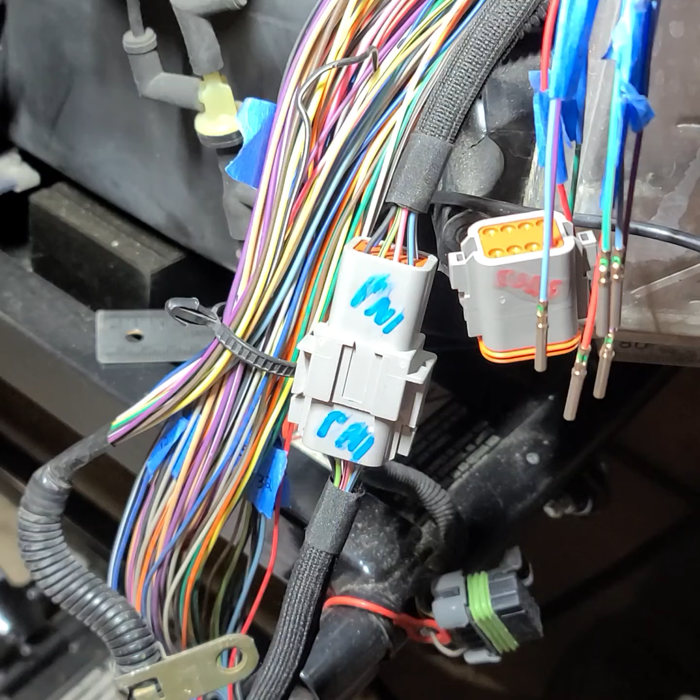Here's something a bit different. Just taking a break out here, it's like 1:30 in the morning. The wife goes to sleep, so I come out here to do all the fun things on the car, like wiring, because it's January 30th, so it's freezing out here with the propane tank taking my oxygen. So why don't I talk more, right?

Something different - this is a Haltech install I'm working on for my 2003 Corvette. Everybody in the world is a Holley user, and I understand the benefit of having friends and local tuners who understand how to tune it - if you have a problem, you have support. That's really helpful, especially if you're not sure what you're doing and don't have much experience, which we all cut our teeth on at some point.

You just got to jump in. But a lot of reading and a lot of talking to people who actually use their cars more than I have. So I'm stepping up to a higher horsepower.

This is a 402 LS2 with, it's going to have a V3 Si. Pretty good sized cam and heads right now - just a jam cam, kind of old school for 2023, but soft on the valve train for medium RPM. I can push it with my valve train, I can go to like 7 if I want to, as long as it still makes power.

I've got the Innovators West damper, so it's going to have 10% overdrive, so my pulley is going to be the same as if you ran like a 3.27. I'll be maxing out that head unit RPM pretty quick, easily by around 6,000 to 6,500.

But the topic here is wiring in the Haltech. So just something different - the Haltech offered, the more I read about it, much more expansion and a lot more opportunity for programming with your car. This is also the 2500T in the Elite series.

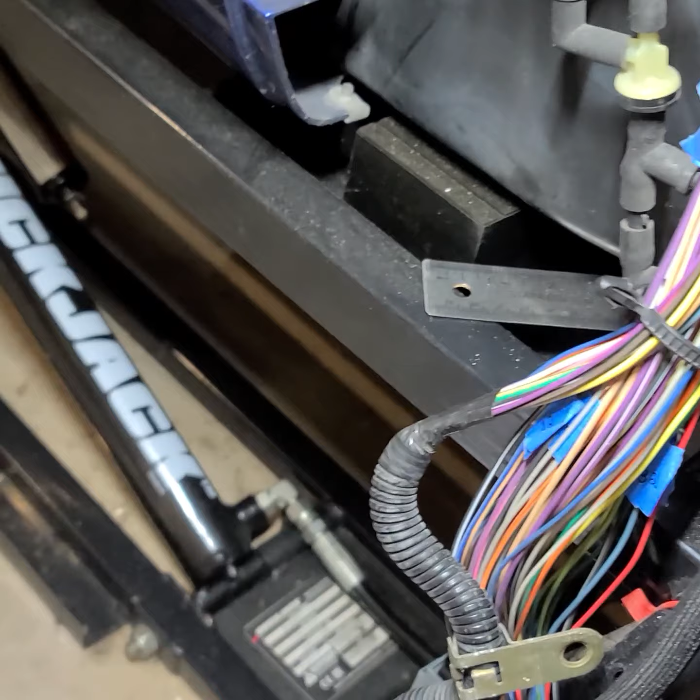Now since I bought it, the Nexus has come out. I don't have much need for the Nexus - this is a modern car, I don't need a lot of power drivers off the ECU. Not a bad thing, but as it turns out, this is also still beneficial for me because the software that comes with the Nexus can now be retrofitted to the Elite Series head units.

So I don't know anything about the software. I've used EFI Live for years, and I'm a hobbyist at that, so I'm not some crack tuner, but I can go in there and get done what I need to get done.

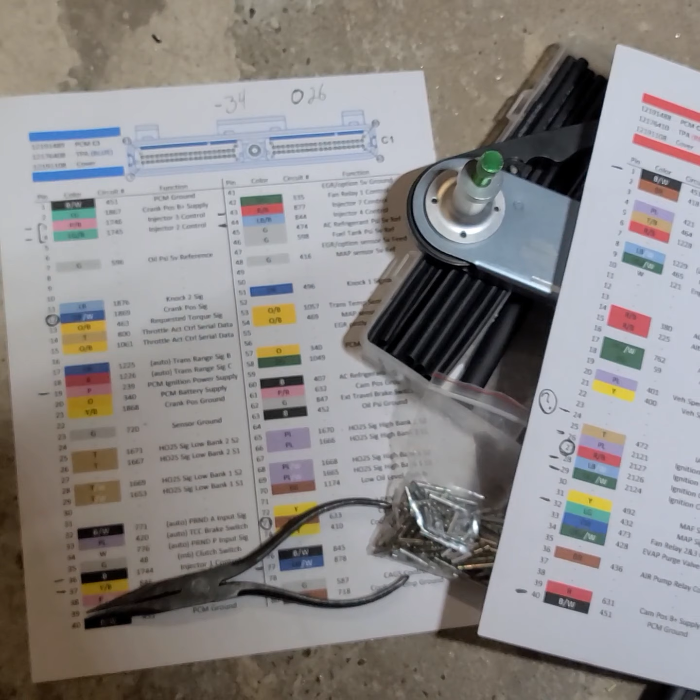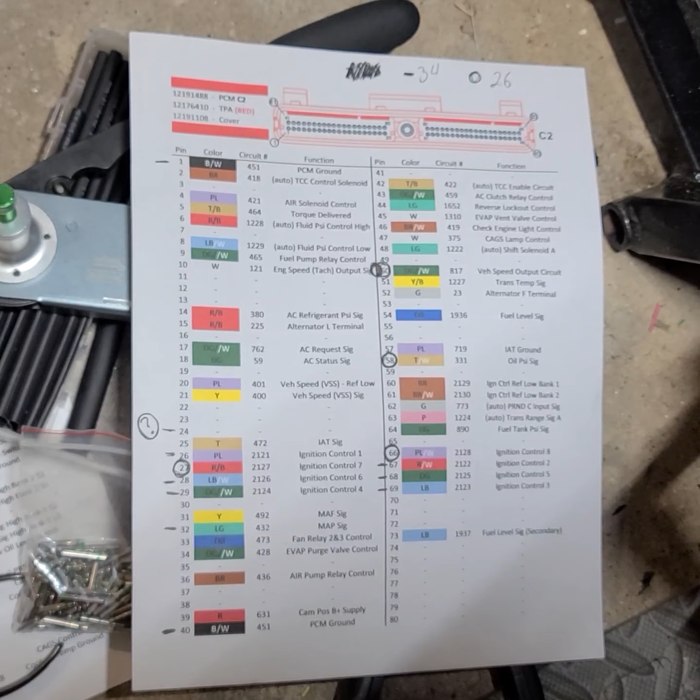And these are just some wire diagrams for the caps. If you're looking for these pinouts, you can get these as well as the TAC pinouts, as well as the Haltech conversion - like my own double-check version of that - right on the Corvette forum. If you look it up, I don't know what the heck I titled it.

My username there is Tusc, T-U-S-C. I have heritage which is Tuscarora Indian, so I don't know, I've stuck with that for years, but...

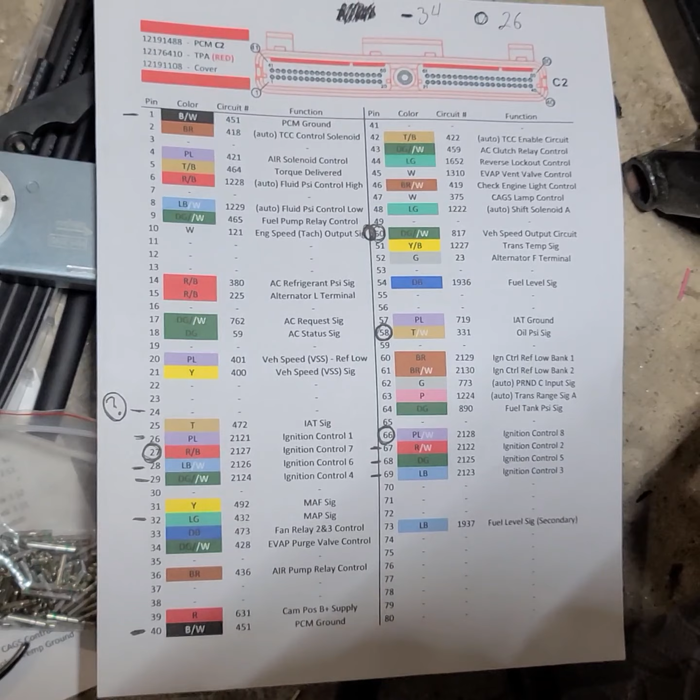If you look up that username and the term pinout and PCM or TAC module, it'll come up. It's an Excel file, and you can just easily print it out - color-coded wires, handy. There's a lot of stuff that I found which was good. It was older, but this is handy - one page each, there's no chasing information. Really easy. And this is daunting to me because there's so many wires, and I already caught myself making one mistake before I finalized a wire, so you really have to double and triple check.

So it'll take a lot of abuse as long as I shift it right. And again, the power, I don't know where it's going to land - probably north of 700, give or take. And this is rigged to run ethanol, so I'm sure once we get everything shaken down and running, we can start climbing to the moon.

But in a modern world where everybody out there has these 8 and 10 speed automatics, and they just make every darn car always in their power band, nobody has to think to drive and go fast. There's no driving, or at least not as much out there. So this is a bit of a cheat.

So the Elite gives you one benefit: you can do no-lift shifting. So just keep your foot on the pedal, keep cranking, and as soon as the engine detects that the clutch pedal starts to move, it knows what's happening and it just changes the tune table a bit. The engine adjusts - it's not screaming off the rev limiter.

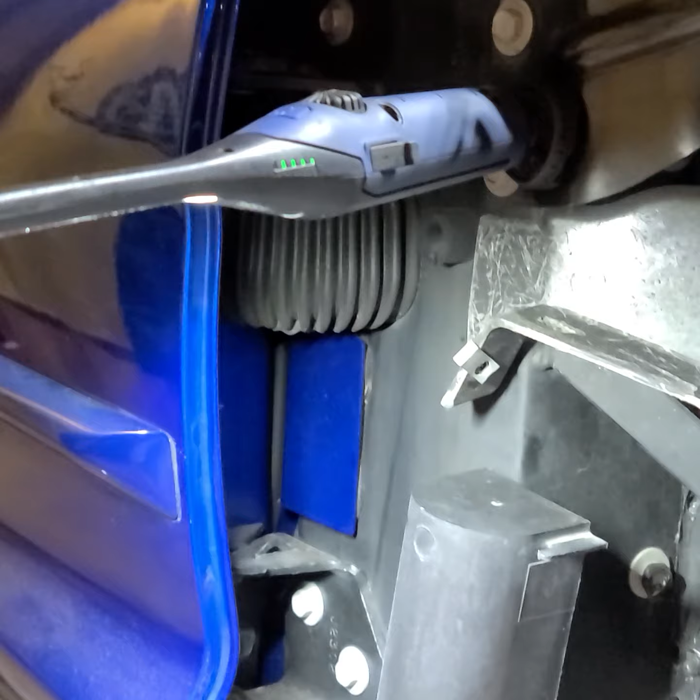I'm not really a fan of most wide body kits. I used to love them on the Z06 body. I don't know, lately they just seem like the C3s look revived, a little bit hokey. Or maybe it's more so that C5s have generally reduced in price, so for a lot of people they're beaters, and I understand that because I have a 99 coupe out there, which I love - it's hardcore. It's held up for years, but it's a beater compared to this one, for sure.

120-something thousand miles, lived outside all the time. But what I was saying is a lot of time you see the flares, it's guys who are high school, college kids, or it's their first Corvette, and they're just slapping stuff around and it's a little goofy, a little hokey. Or they don't bother painting it, and you don't have to. I'm a big fan of run what you brung, so I have that at heart. Go beat the shit out of these things - they like it, they don't complain much, and if they do, they're easy to fix, as long as you've got some mechanical background.

But it's that in-between range. Like, you either go for the clean build, which this one I'm trying to - I'm putting more money into it than I should have, I'll admit that right up front. But I know I'm going to keep this one. I love the Electron Blue, I love the Z06, this is definitely a keeper. So once the LS6 let go, yeah, we'll just keep piling money at the problem.

But along the Haltech topic, this is also daunting if you're - I'm not an electrician. I did swap an LT1 and then an LT4, these are the 96 variants, into a 91 Camaro back in 99.

I graduated college in a year and a half, and having worked full-time three jobs at the same time, I saved every penny. And when I graduated, what did I do? I took my 91 Camaro with a perfectly running 160 horsepower dog 305 TBI and threw that away. Took a junkyard motor, dumped it in, converted the harness, which took 3-4 months of going through diagrams, because we got the computer to run with the factory harness, with the factory gauges. So that was like combat level headache, but got it done. And that was also 99.

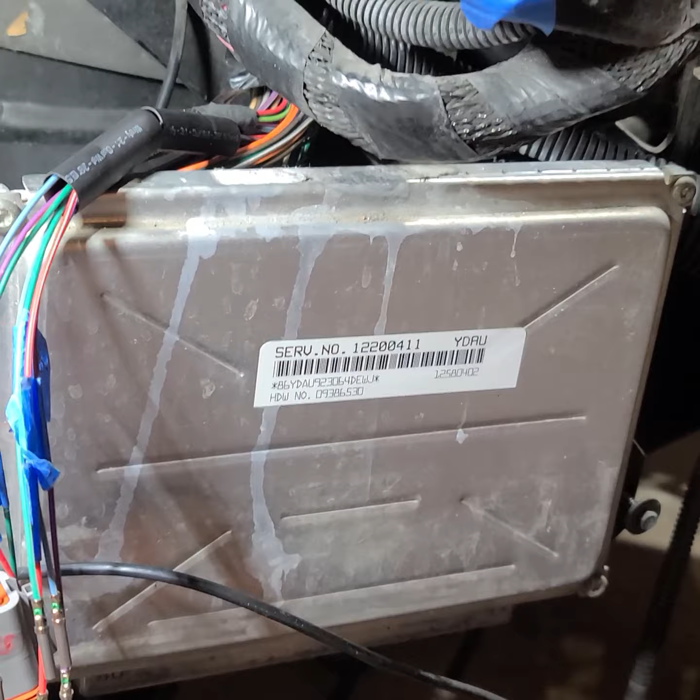So just to share, for all that background that I've been jabbering, here's the wiring harness. So here's the PCM, we're in the passenger wheel well. Everything's kind of gutted. Here's a quick shot of the engine sitting there. My, what was that, Eddie Motorsports valve covers, which I customized and then had them powder coated by a friend.

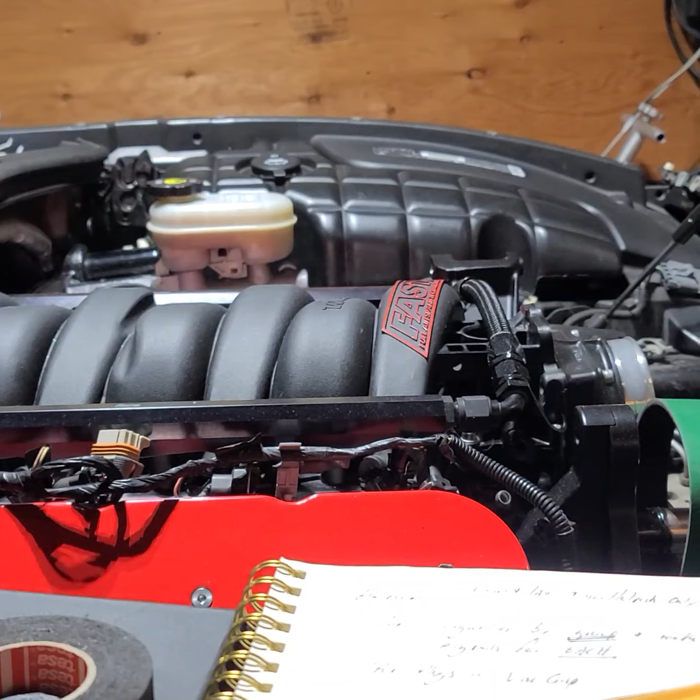And I wouldn't have gone with the FAST intake, I would have stuck with the LS6 if the car came with it in factory and throttle body. But since this came with it, I'm not going to sell it. It's not going to immediately crack apart or fly away. Some people think that's going to happen - it won't, and if it does, whatever.

Just one more thing, so it's in its different states of development. The fuel system is complete, wiring, etc. I did it with one connection on the back of the driver rail, and in this case that's easy to do because they have slightly lower engine mounts. But that's the jewelry box next to me.

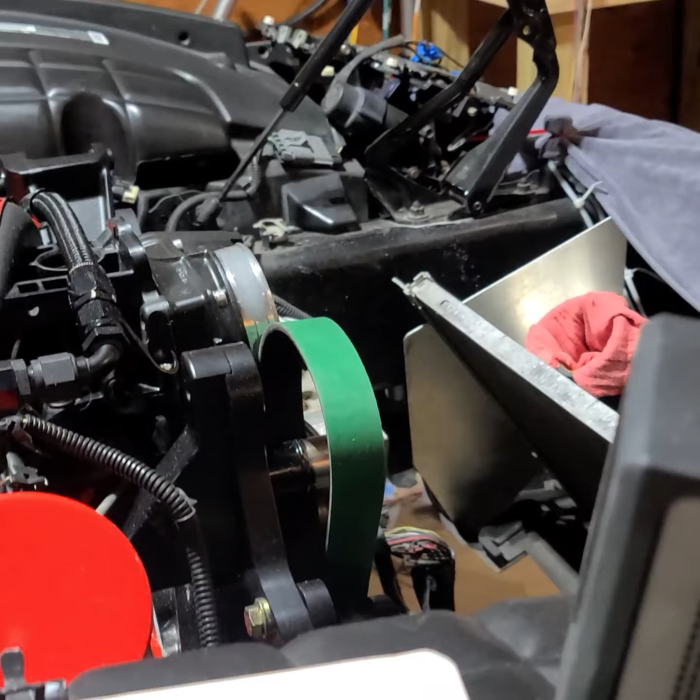It'll be a lot more fun once there's a big polished supercharger sitting there. And there's thoughts, you know, the engine hopefully will take it - I mean it'll take the supercharger, but the weakest link I have is the block. This is what you call project creep, and this is project creep right here that we're looking at, because it started as, well, the LS6 blew, it was a lifter that let go, and I thought, oh I'll just magnet out all the needles and just screw it, send it, go back to work.

When I pulled the oil pan, it had part of the lifter wall down there, so that was it. The block was junk. Initially I was just going to dump a truck engine in, or an LS1 or LS2.

Well, for whatever reason, I think maybe it was COVID, everything disappeared. I couldn't find anything locally on Marketplace or Craigslist or any forum pages. I was like, what the hell, where did all these engines go? And we don't have a lot of pick-and-pulls up here. So I was like, well, I'll just buy a new block. So I got an LS2 block, and we've gone from there.

And it was just going to be, well, I'll do pistons. Well, I got a deal on rods, these Lunati signature rods. Then I'm like, well, let's go a little crazy.

First I had read some stuff, and then I've been working with Brett down in Texas. My name is Brett, two T's. His name is Brett, one T. So I call him Bray. He calls me Brettita, and that's our vibe.

But I've definitely latched onto his experience. He was the first guy to get a C5 to 1,000 rear wheel. He's definitely saved me a lot of headache, because if you read forums, people share common knowledge and reiterate lies about cars and performance. But when you talk to people who actually build and race the cars, you're like, oh no, you don't want to do that.

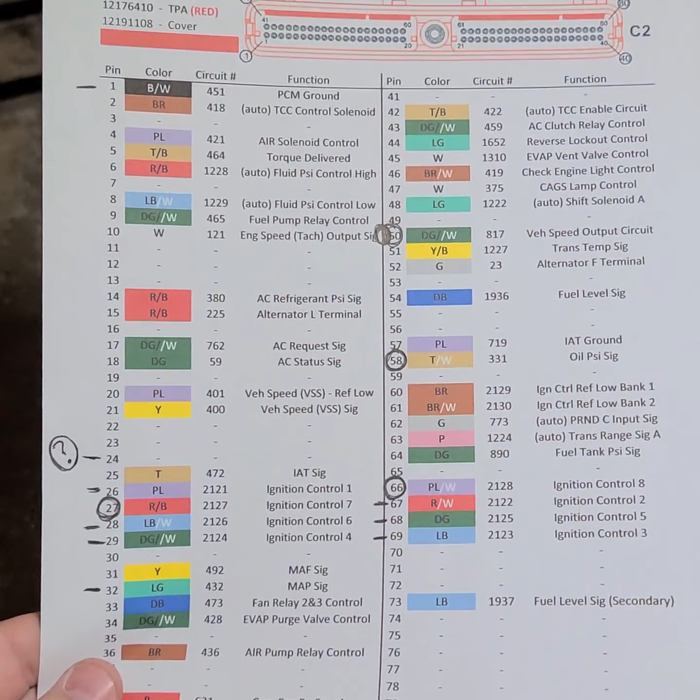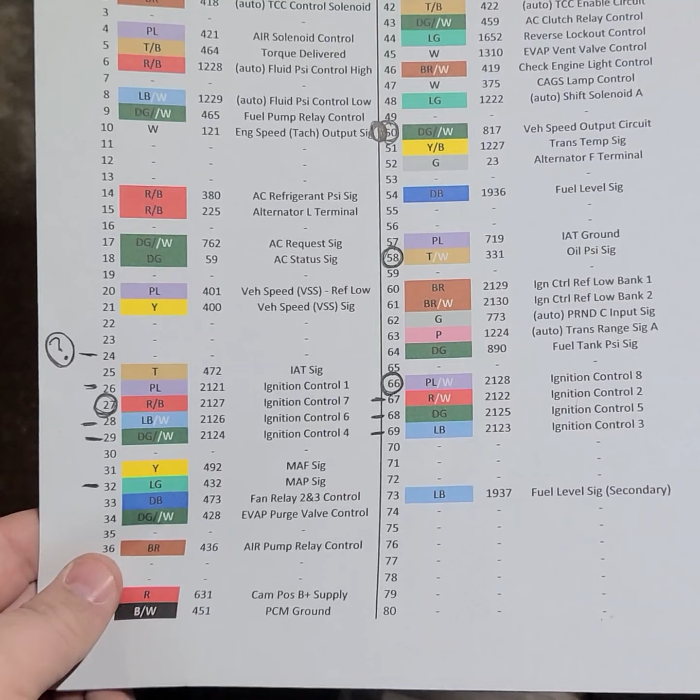So here's just looking at the wiring. The wiring is pretty easy, once you have a list of what you've got to look at, how to find everything, how to identify it, color code everything, what goes where. I went through and marked it, which ones I have to pull, which ones go to which harness. You see the question mark, I have to add a line there because I'm disabling the DBW. This computer on the car has to think it has it coming back, so we have to kind of fool it.

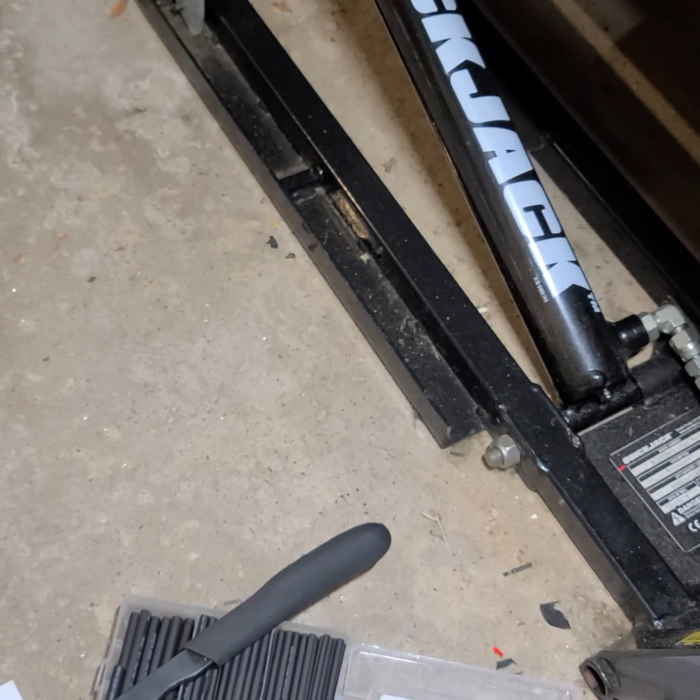But one thing that I will say helps, I'm an okay person with wiring, but having the right tools makes a difference.

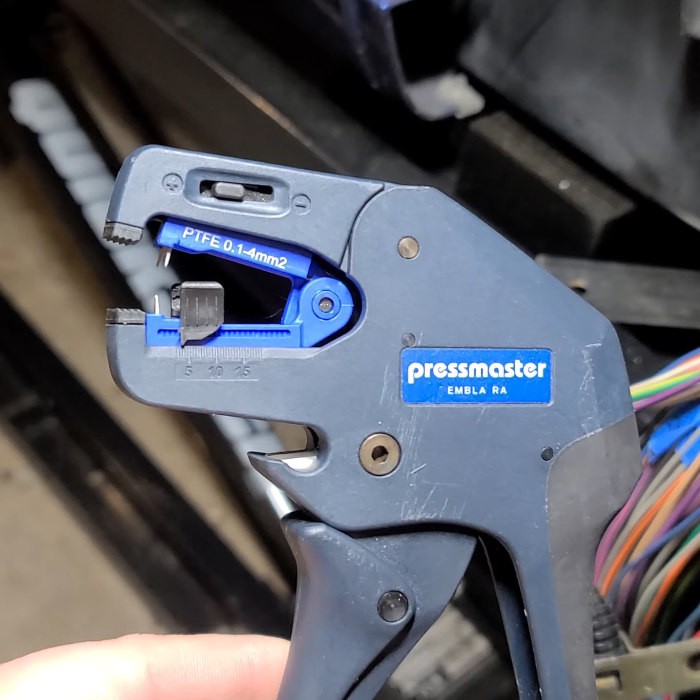Pressmaster, this stripper, is amazing. It does 12 to 28 gauge wires. With the depth setting here, you easily adjust how far back you want to crimp. And with this setting here, you adjust basically finding out what the sheath or shield thickness is, and you have perfect uniform strips every single time.

You look like a pro. So you're not mismatched - some have long connections, some have short.

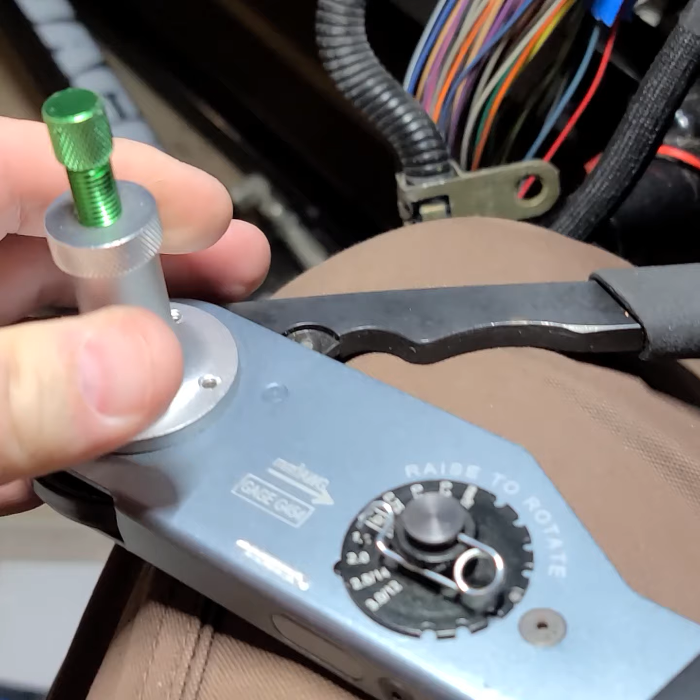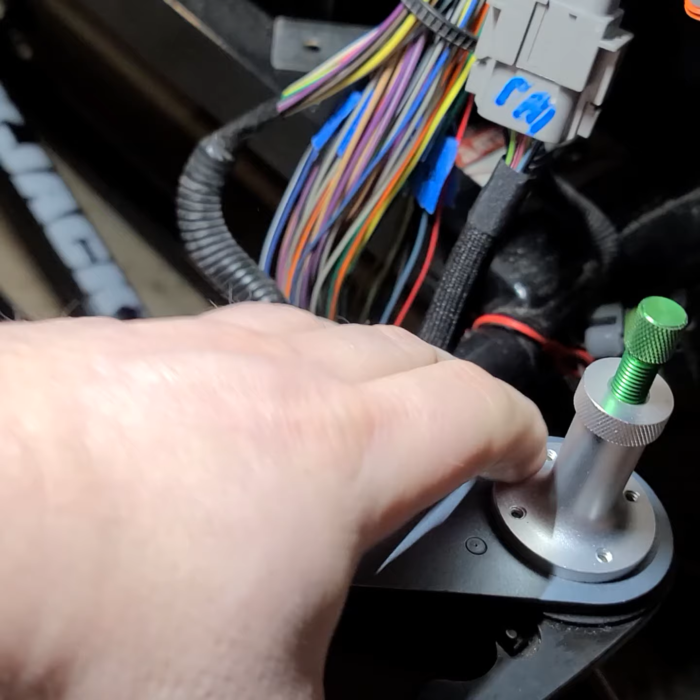That's great, and I did invest in a Deutsch tool. If you want to look or feel like you know what you're doing with simple car wiring electronics, this tool makes it very simple. You can adjust the depth of the compression on the fitting with this wheel. This is the size adapter, you can change these out, and it'll adjust for different size fittings. This ranges from 12 to 24 on this tool.

What you do is put your wire end in this hole, squeeze it, and it crimps. You can't let go - once you start, you have to complete the crimp. It presses from 4 sides equally, so you have watertight seals on all your electronics just from that compression.

So here you see some of the, I guess this would be the female end going in. These are just hollow, and the male end fits inside. It's a really clean fitting. These are weatherproof, better than WeatherPack, and super easy to work with.

As long as you have the right tools, and that's about $300 worth, you can always sell them when you're done. But wow, I did all of my fuel wiring, everything, with these pins. It's a great way to go.

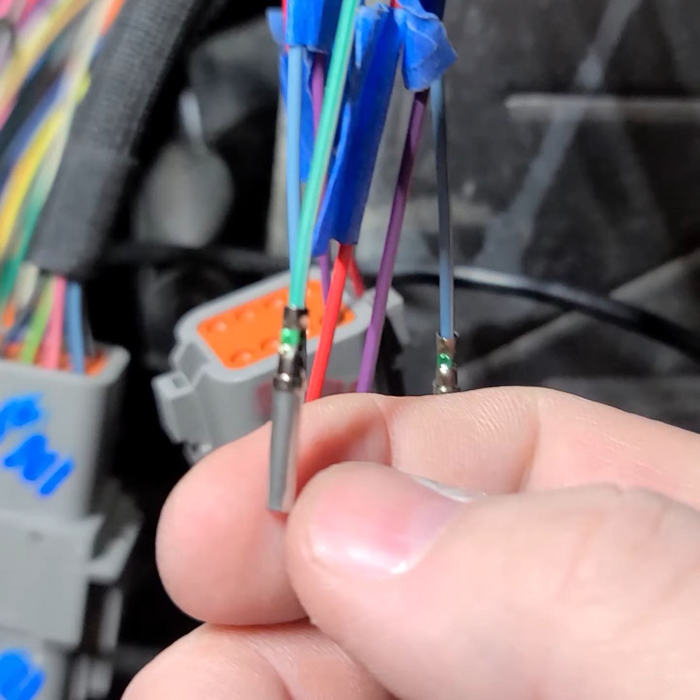If you're afraid of it, not sure if you'll get it right, the tool is always going to compress this perfectly. These 4 points, if it'll focus, it just works out right. Makes it easier than it could be.

Then I just use some loom and high heat Tesa tape to clean that up a little bit. But if you have to do this, I'm hoping other people can benefit and follow my footsteps or do their own thing, because not everybody does Holley. It's not the only game in town, and they are good - I have nothing against them. I have friends that run it successfully, no problem, making money on the track.

But if you're going to do this, it's pretty easy - you take your pins out. It's easier for me because I took the fender off. If you had to do this, I'd still take the fender off to reach everything, but you could also fish all of this up under the battery if the battery is out.

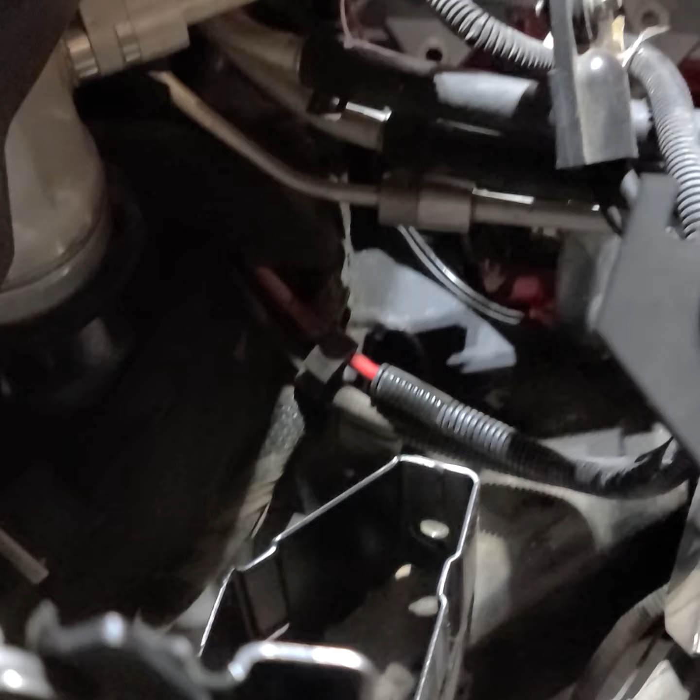You would have access in there. You can just do it in the engine bay if you needed to, not a problem. I have direct access now because mid-project it's easy.

So I went through, you see all the simple painter's tape - I very carefully double-checked every wire. I took the back harnesses off here from the PCM, and you just trace every wire back. I was going about 6 and 9 inches and marking it, then cutting whichever ones I needed in the middle, parsing them, and away we go.

So here I have the injector harness - this is the computer side, engine side. This will feed into the Haltech eventually. That's how that'll go, trying to make this clean.

But nothing to be afraid of. I hesitated for a while because it's something you don't want to screw up, especially because you don't want to have to go back in there. You never want electrical problems, ever, on these cars - it's all about the grounds on these cars if you own one.

So, yeah, not a hard project, just a slow one. You're going to definitely take your time and get the detail done. I've got - Jesus, this is a long video, I talk a lot. But someone somewhere is going to benefit from this, even if only 2 people look at this in 20 years.

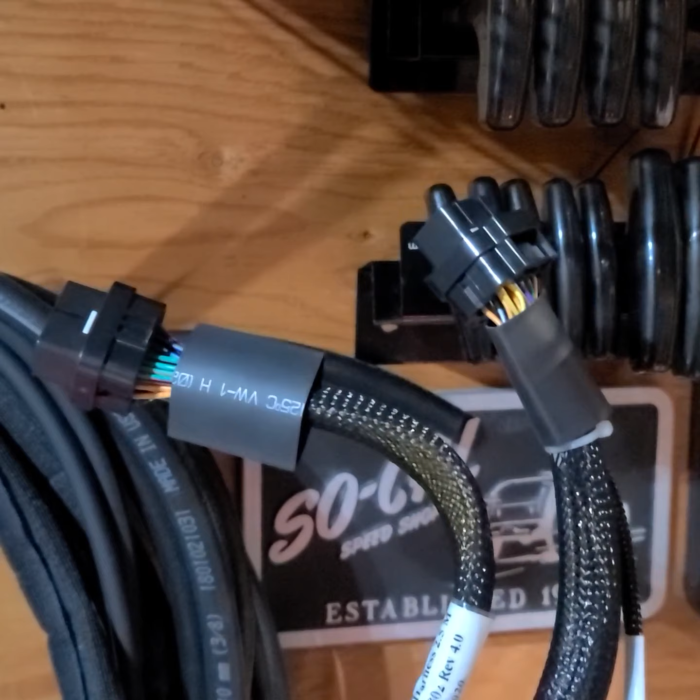Over here is the main harness itself - this is the Haltech harness. I think it's a 32 pin and a 26 pin, or 34 and 26, I forget. And the rat's nest that comes out of there, I've just kind of let it spool on the ground for now.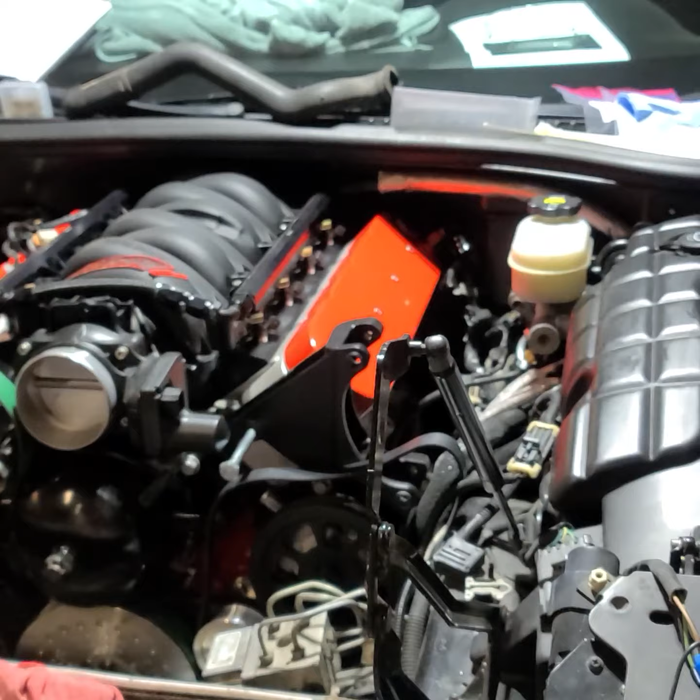That'll all go in the car. I'm not a fan of keeping it in the engine bay, but here it is as it sits. Hopefully we'll hear this run this spring - this is end of January, so maybe another month or two. I do have to send the exhaust back, waiting for them to send me the shipping because it was an error. We'll get that straight.

But yeah, that's it - don't be afraid, dive in. The hardest part is the start, and then it's just slow and steady.

But this has been 20 minutes, I'm going to get back to work. So don't be afraid to hit this up - try the Haltech or Terminator or Dominator, whatever you're going to try. Go for it. The tools help.